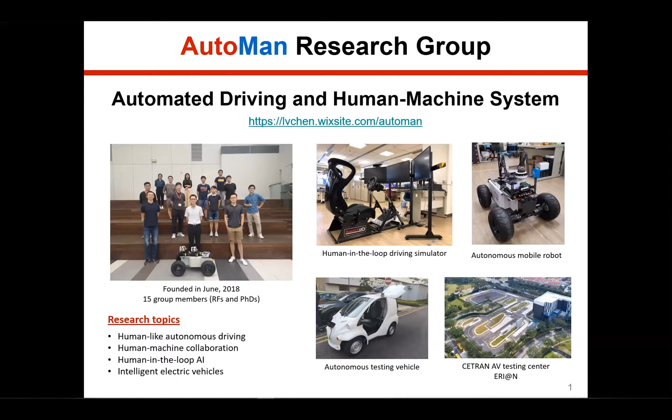The first topic is human-like autonomous driving. Here the idea is not only to realize those basic functionalities of autonomous driving. Instead, we hope to move one step further, to further improve the smartness and ability of AV systems, making their decision-making, path planning, and control more like human drivers.

Because for our human drivers, we have different driving styles or different habits and preferences on driving. Some drivers are aggressive and some are more conservative. And for different travel demands, their corresponding driving behaviors could be quite different.

So in the future, we hope our AVs could be smart enough. They could have their own human-like characters and driving styles, and they could adapt to different travel demands of individual users.

In order to realize human-like autonomous driving, first we need to understand our human driver behavior and mechanisms. How does a human driver drive a car? Here we use inverse reinforcement learning to model human driving behavior.

More specifically, first we formulate our human driving behavior with different objectives and preferences as a multi-objective optimization problem, and design a reward function to represent it. Then by leveraging inverse reinforcement learning and naturalistic driving data, the model can learn the parameters of the reward function directly from the real-world driving data.

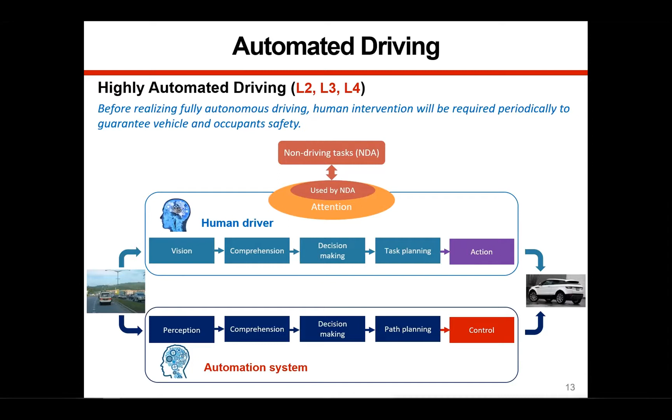Here we develop a novel human-machine collaboration framework. We make no assumption that human driver performance is always better than automation, or that automation is always better than human. Instead, we need to monitor both human and machine status and assess their performance simultaneously.

In order to realize the high-level human-machine collaboration framework, we made efforts to develop multiple supporting subsystems. First, we use computer vision techniques to understand human driver in-cabin activities, to understand what they are doing in the cabin. Here we develop our models using deep learning and transfer learning.

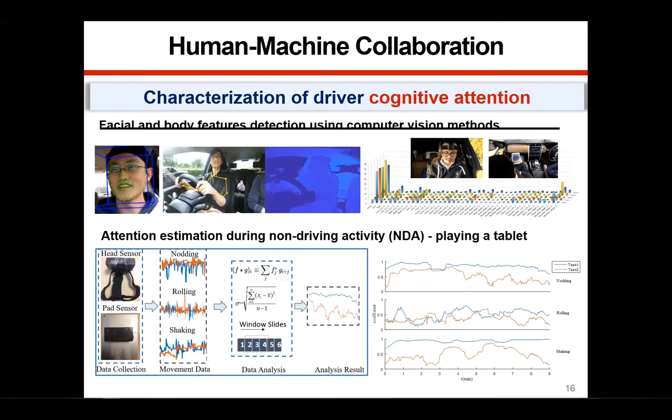Besides, still based on computer vision technology, we combine driver's eye gaze direction and scene features to further improve attention estimation accuracy. We use an RGBD camera to capture driver's eye gaze direction to understand where the driver is looking. Meanwhile, we use a saliency map obtained from scene analysis of the surrounding environment to infer potential attentional regions of the driver, then link them up and fuse them together to further improve the estimation of driver's attention level.

In addition to attention, intention is also a very important state for human-machine interaction, because we need to understand the human driver's intent in order to support him or her and mitigate any conflicts happening between human and machine. Although intention itself cannot be directly detected, it can be reflected indirectly by certain patterns of driver activities.

For example, if a driver wants to change lanes and overtake a car, first he will need to check mirrors and give a turning signal, then take steering actions on the steering wheel. So here we develop a deep neural network model to analyze driver activity patterns, and then extract the intention from the pattern features of drivers' sequential actions.

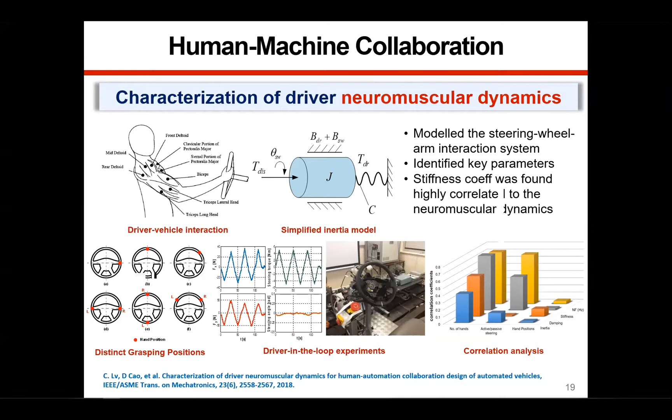Apart from driver state estimation and monitoring, we also design adaptive shared control for ensuring safety of the AV. By evaluating the performance and risks of both the human driver and automation systems' intention and actions, the shared control module will dynamically allocate control authority to human and automation. The haptic steering torque will be generated to better provide guidance and assistance to the human driver during shared control and takeover.

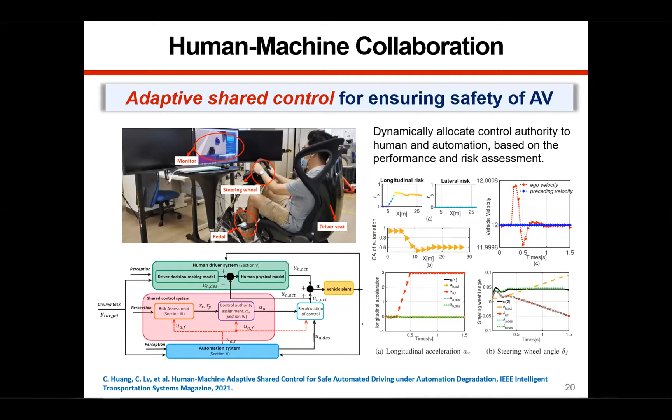Finally, by integrating all subsystems together, we develop our first version human-machine collaboration prototype system and implement it on a real testing vehicle. Experiments have been conducted under typical driving conditions.

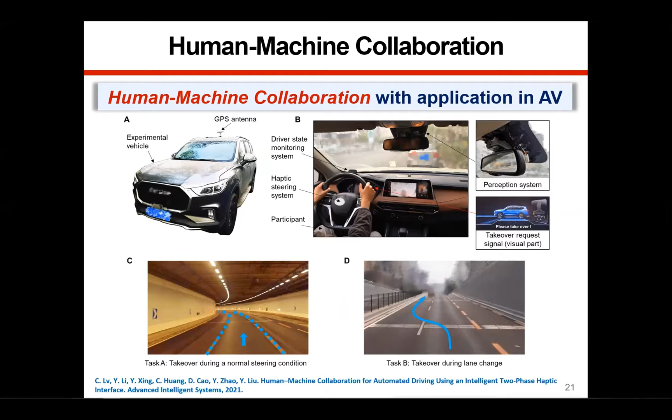Okay, that's all for my presentation today. Thank you very much for your attention. And if you are interested in our research, or if you have any queries regarding our research, please feel free to drop me an email. I'd be very happy to discuss with you. And I look forward to meeting you in the future in person.

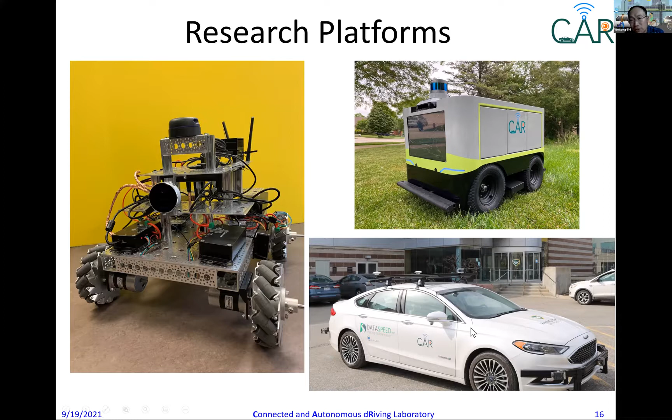The left side is an indoor autonomous vehicle for us to test our prototype indoors. And on the upper right is what we call Zebra T. Zebra T allows us to evaluate things. It's a slow delivery vehicle, but it allows us to do this in the neighborhood, on campus, etc. It's very slow speed, no risk. And the last one is when we develop real stuff running on the road. We're starting to use this Hydra platform on the highway and city roads.

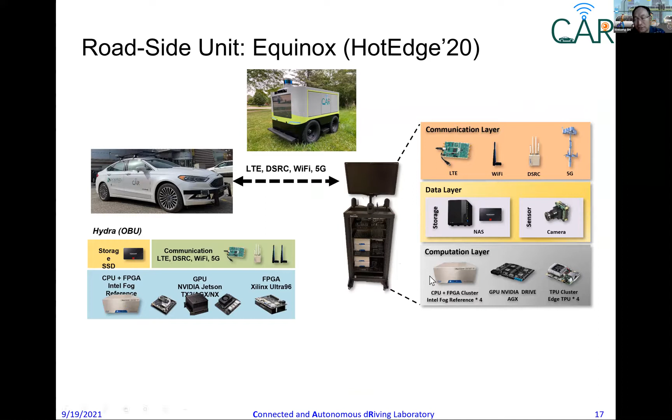In addition to that, we also developed some edge servers. You can consider this an edge server, but it's serving more of these purposes. Thanks to industry partners who have donated different kinds of communication and computing layers here, we can do Wi-Fi, LTE, DSRC, and most recently C-V2X, to allow us to evaluate the vehicle talking to them and evaluate the different platforms.

I still have about 7 minutes here, so I can give you a little idea of what we have done leveraging these platforms. One is what we call E2M. It's called energy-efficient middleware, because if you are in the vehicle, whether it's an electric, battery-powered vehicle or gas-powered, you always want to minimize the energy you're spending on the computing itself.

So that's the idea. We have a paper published in 2019 in the edge computing SEC conference. We have been working on this, trying to coordinate the events. Right now, most of the applications people develop for the vehicle don't actually coordinate. But at the OEM level, you might want to coordinate this. Otherwise, you will be wasting a lot of energy here.

So the results show that the sensing equipment itself costs a lot of energy, and computing also costs a lot of energy.

Together, depending on what kind of road you are talking about, they might contribute about 30% of total energy on today's vehicle. So if we can reduce this, for example, by 50%, then you can save 15% of the total energy on every charge. For example, in an electric vehicle, that can save a lot of energy. So that's just to show you an idea that we have been doing.

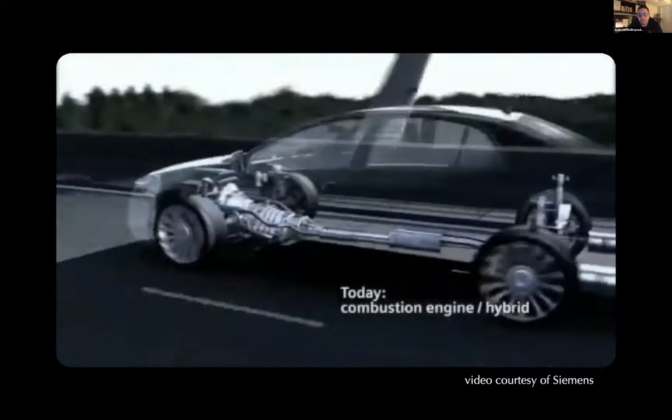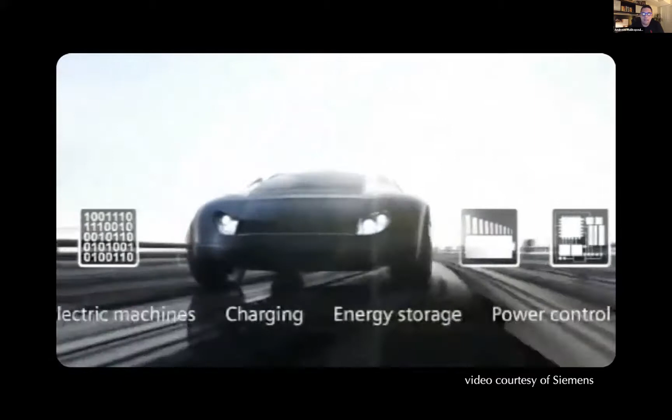So today, what I plan to do is talk a little bit about how we can develop optimal control techniques that we can use to coordinate connected automated vehicles within particular traffic scenarios. We live in a world that is changing, and we're about to have several paradigm shifts. For example, we're about to depart from conventional vehicles with internal combustion engines and move on to pure electric vehicles, which will cause a significant cascade of events and change the landscape of the infrastructure.

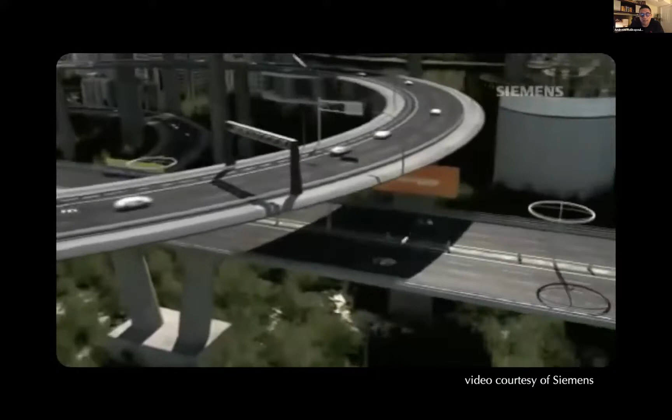We will see a lot of charging stations, shared information, different types of challenges and problems that we will have to address pretty soon. We will have to coordinate energy demand. We have to coordinate different travel demand. On top of that, the landscape of the cities will change with more renewable resources. And as this is all happening, pretty soon we'll have connected automated vehicles that will share information and create a lot of data. So all this is a picture of what is coming in the area of emerging mobility systems.

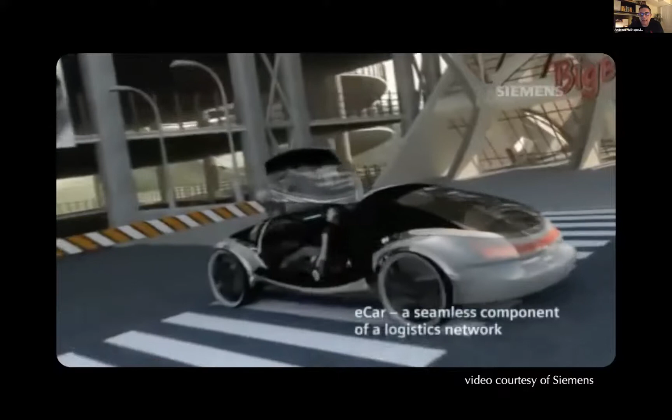And my point here is that we need to develop advanced control techniques that will be able to address those challenges. In this picture and vision that Siemens put together, and we can agree that this is happening, you can see different problems, and all these problems refer to cyber-physical systems. The idea is how we can develop advanced control technologies that can help optimize these cyber-physical systems. Today I'll focus on connected automated vehicles and show you some work we have done to optimize traffic flow with connected automated vehicles. I'll show you some simulation and experimental results, and then discuss a couple of directions for future research.

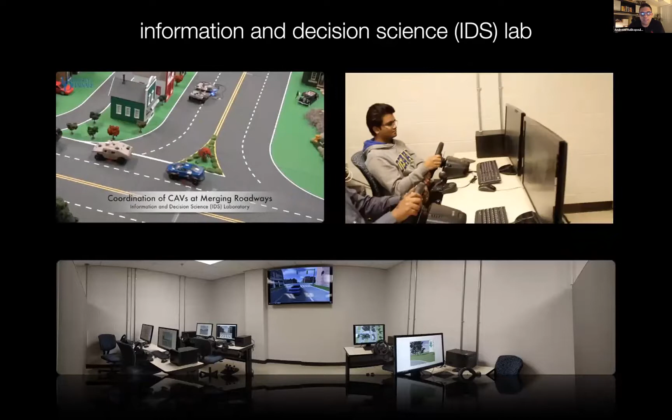We also have a driver simulation testbed with 6 driver simulators that we can use within any commercial software. We use PreScan and VISSIM. And replicate any city in the world that we want to explore. So that was a little bit of introduction about my lab.

Over the years, I have had the chance to work on different problems in the area of mobility and transportation. I started with developing control algorithms on the powertrain of the system, and in particular, how we can make the engine learn the driver's driving style and eventually optimize its operation with respect to the driver's driving style. Then I moved on to hybrid electric vehicles and plug-in hybrid electric vehicles and how we can optimize the powertrain of these systems. And for the last 10 years, I've been working on connected automated vehicles and how we can use shared information and automation to improve the transportation efficiency. This is the topic of my discussion today.

I'm going to try to focus and show you how we can use this shared information and automated features in order to improve efficiency in scenarios like this. In scenarios where we have potential conflict between the vehicles, like intersections, merging roadways, roundabouts, and so forth. Fast forward, before I get to the technical details, let me show you the progress that we have made so far. We've been able to develop control algorithms that can help coordinate vehicles on intersections.

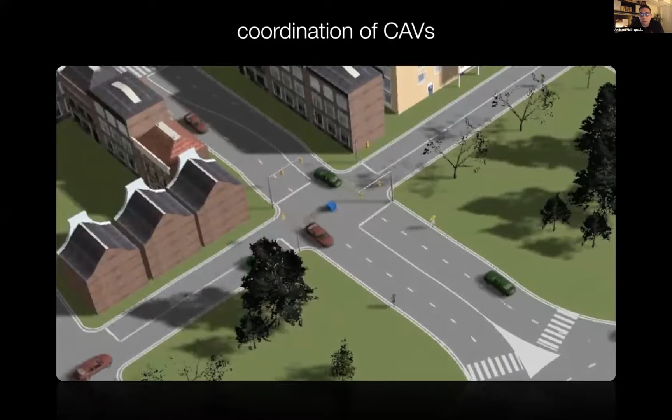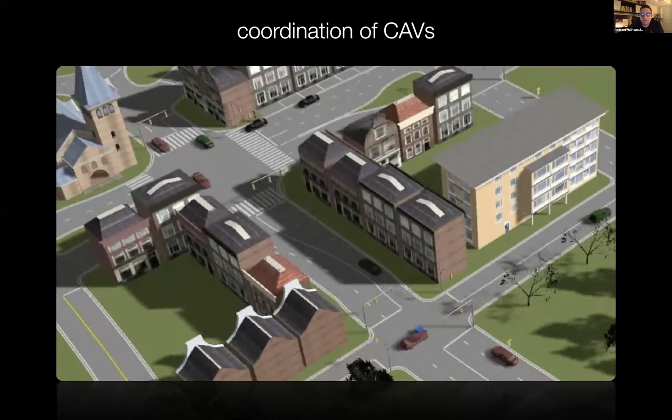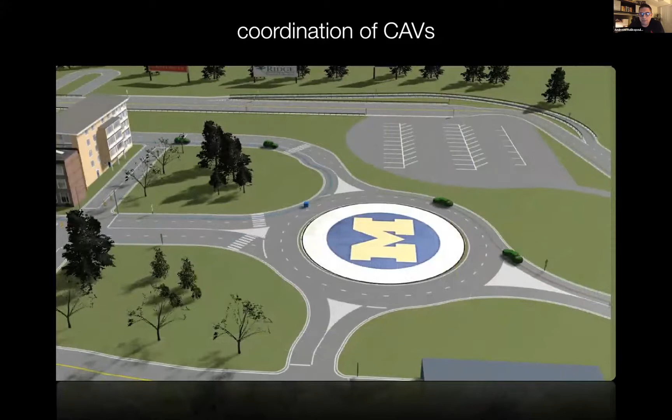We have also expanded this to include multiple intersections in an environment where we have 100% penetration of CAVs. We have also implemented this in scenarios like merging roadways. It's quite straightforward once you solve the problem on one particular traffic scenario to translate the result to different scenarios. We have also considered roundabouts. And then once we put together this toolbox with the solutions for each individual traffic scenario, we can put all of them together and address a corridor.

This is the case where we have worked on a corridor in our scale city that includes a roundabout, an intersection, and a merging roadway. So you can see how all the vehicles can coordinate with each other and cross these potential conflicts without stopping. So with this scenario, we can, in other words, visualize in a scale environment how a smart city would look like in the near future. And at the same time, we can also encounter some of the challenges that we can encounter in the physical world before we go to a physical testbed.

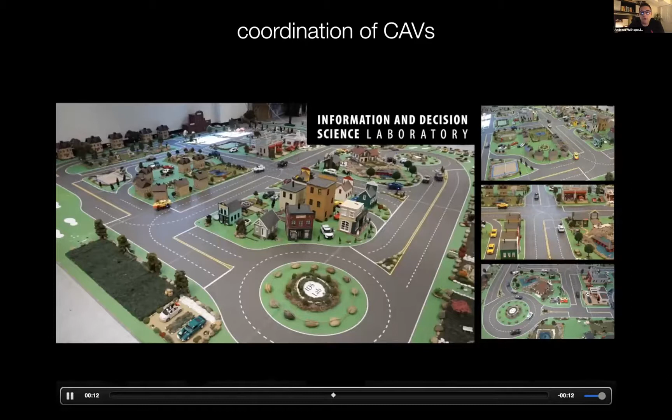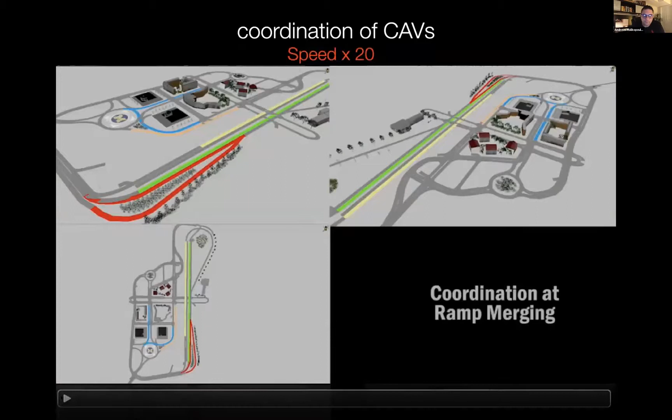And we did that with our test vehicle, the Audi A3 plug-in electric vehicle that we considered during a recent ARPA-E NEXTCAR program project. So with this project, the goal was to improve the efficiency of the Audi by at least 20% using connectivity and automation. So we were able to develop these technologies that I just showed you and run the Audi in M-City at the University of Michigan. So we eventually had the Audi running in M-City within an augmented reality that they have implemented.

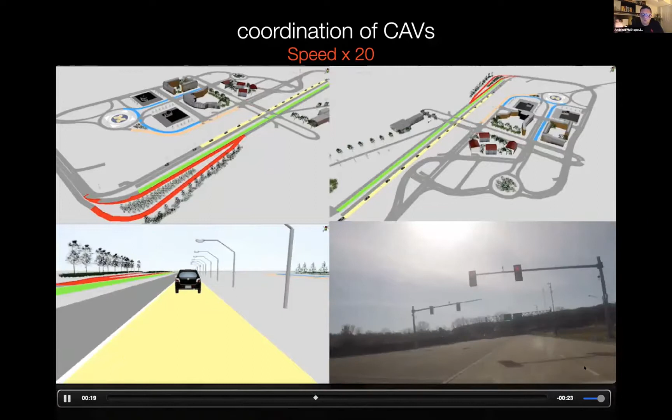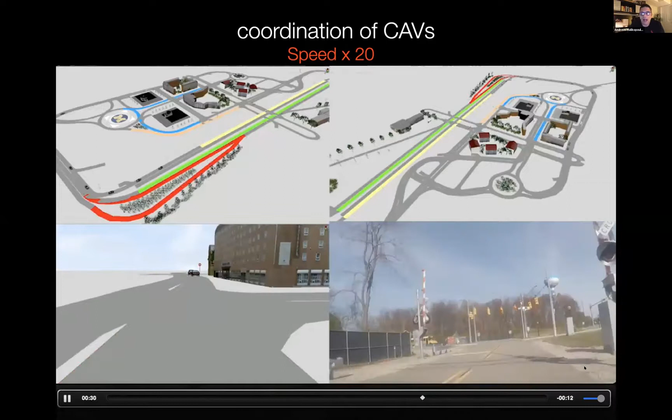So the Audi essentially was interacting with the virtual vehicles, as you can see on the left, and going through different scenarios like speed harmonization, roundabouts, intersections, merging roadways. So we were able to put the Audi in the field, interacting with virtual environments that create a peace of mind regarding the safety concerns, and then address all these problems.

So now let's take a deep dive and see how we can potentially address this problem. I showed you a little bit of the outcome, the final result. I'm going to go back now and show you a little bit how we can get to these areas. To go through these ideas, I'm going to reference an intersection, just because an intersection has some sort of challenges in these cases.

The same analysis, the same exposition can be applied to other traffic scenarios. So we consider an intersection, and let's assume that we have 4 connected automated vehicles approaching the intersection. Apparently, if they keep going, they will have to address some conflicts. So the area within the intersection where we can have a potential lateral collision is called the merging zone. And then we define the control zone, which is outside the merging zone and within the proximity of the vehicle.

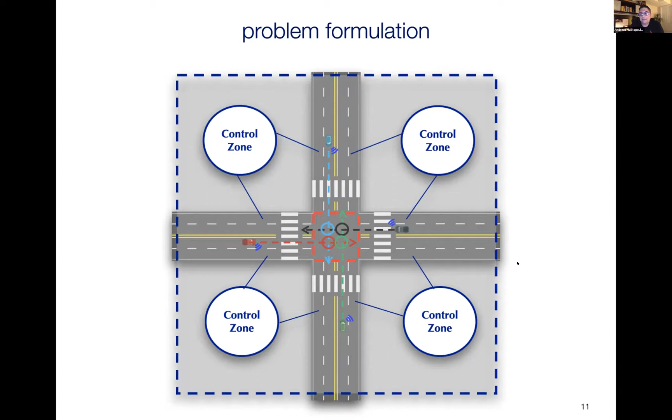So within the control zone, the CAVs can exchange information with each other and then identify the timing that they will be entering the merging zone at the center of the intersection without collision, of course, and without stop-and-go driving. So the idea is for each vehicle entering the control zone to derive an optimal acceleration so as to avoid collision at the merging zone and exit the control zone as soon as possible.

Just to take a look at this problem, once the vehicle enters the control zone, the vehicle needs to coordinate with other vehicles and identify the appropriate timing to enter and exit the merging zone, right? And at the same time, derive the optimal acceleration to cross the intersection. So if you think about it, this is a 2-level optimal control problem.

In the upper level problem, we want to identify the optimal timing that the vehicle will be entering the merging zone so as to maximize the throughput of the intersection. And in the low level problem, given this timing of the entry and exit of the merging zone, we need to derive the optimal acceleration of the vehicle that can optimize fuel consumption.

What I'm going to do now in the next few slides, I'll show you that we can start from the low level solution, the analytical solution, and reverse the solution and formulate a problem that can identify the timing of the upper level problem. So essentially, we can translate these 2 problems into a single level optimization problem. And the reason that we want to do that is that, as you will see later on, the upper level optimization problem is quite involved and cannot be solved in real time on board the vehicle. So we need to have a different way to address this.

So in our analysis, we model each vehicle as a double integrator, enhanced double integrator, where P is the position of the vehicle starting at the entry of the control zone, V is the speed of the vehicle, U is the control input, acceleration, deceleration, and S is the distance of vehicle I from the preceding vehicle K, right? So this is the proximity sensor essentially of the vehicle. Now, somebody might argue, well, this seems a very simplistic model to capture the vehicle dynamics, and that would be a fair argument.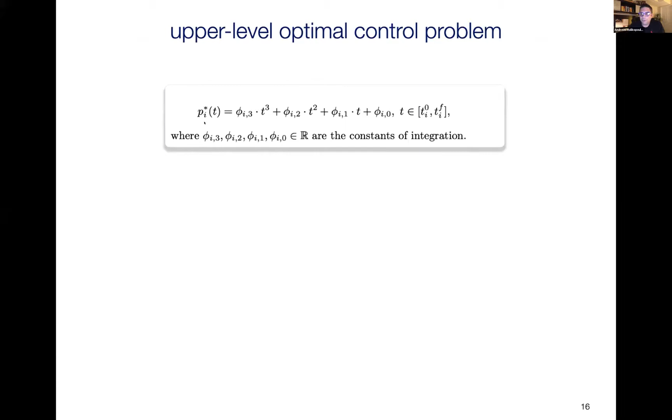So you can get an idea of the kind of complexity we can encounter. Instead of going this way, the idea here was to start with an analytical closed-form solution of the unconstrained case, where no state or control constraints are activated. If you remember, we have a nice cubic polynomial function for the position of the vehicle, and the control input was a nice linear affine function.

Now, the idea is that if we reverse the position versus time, the optimal position versus time corresponding to the unconstrained case, we can get the so-called time trajectory of the vehicle with respect to position. This gives us, essentially, at which time the vehicle is at each different position within the control zone. Once we have all the time trajectories of vehicles within the control zone, any new vehicle that comes in can search within these trajectories and draw a new time trajectory that avoids intersecting with any existing trajectories, while minimizing the time the vehicle exits the control zone.

Once we identify this optimal time trajectory, we can inverse back and get the equation, essentially the optimal position of the vehicle corresponding to the low level optimization problem. With this idea, eventually we can solve both problems at the same time.

The first question we need to address is whether this inverse function exists. It turns out that this position is a real value function, and it is differentiable. It's also a strictly increasing function, so the polynomial function P is a one-one function. So we know that an inverse function exists.

Using Cardano's method, we can compute the inverse function, the time trajectory of the vehicle, which looks like this equation. In this particular case, omegas are the new constants of integration, which are functions of phi. So if we imagine that this is the time trajectory, it gives us the time of the vehicle at its different position within the control zone.

Now, if we evaluate this function at the exit of the control zone, we essentially get the time that each vehicle will be exiting the control zone. We can use this as the objective function for the upper level problem. So essentially, if we evaluate the time trajectory at the position of the vehicle at the exit of the control zone, we got a function, which is a function of phi's.

So imagine that we have the time trajectory now, and we have the phi's that we can play around and shape up the time trajectory. Once we got the objective function to minimize the time that the vehicle will be exiting the control zone, we have the phi's that we can use to shape this time trajectory and avoid any collision with other existing trajectories within the control zone.

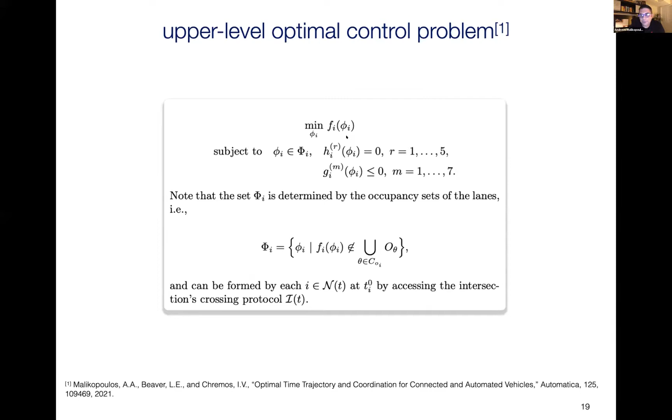Two nice properties we get from this formulation: we can prove that the objective function along with the equality and inequality constraints are all convex functions. By applying the KKT conditions, we can show that there's no duality gap in the upper level problem. So essentially we can solve this problem in real time.

We have implemented this in different scenarios. I'll show you some results right now. I showed you some results already at the beginning, but we have also captured two intersections, merging roadways, speed reduction zones, and so forth.

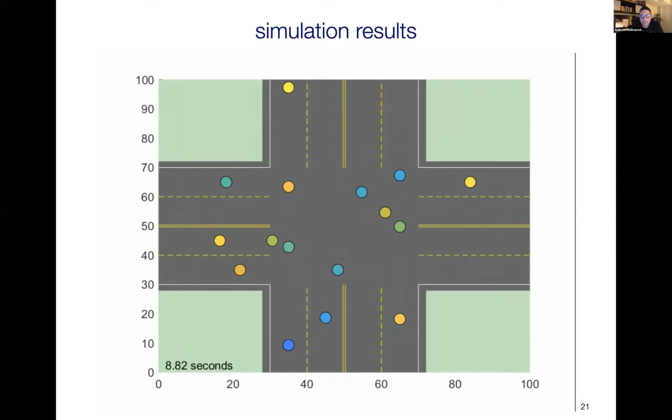This is a scenario, the very first simple scenario in simulation, when we have multiple vehicles crossing the intersection. As you can see, all the vehicles derive their time trajectories and they can cross the intersection without stop and go driving, without any collision.

And again, I want to emphasize that all the vehicles here are connected automated vehicles, and they all follow the same control algorithms by deriving an optimal time trajectory.

And then we moved on to our ARPA-E NEXTCAR project Audi vehicle, and we first started on a chassis dyno at Bosch Farmington Hills facilities. So we put the Audi on the chassis dyno and went through a virtual environment with virtual vehicles.

These are some samples of the speed profiles. In all the cases, you can see that the Audi with our control algorithms eliminates stop and go driving versus the baseline scenario, and we eventually get benefits ranging from 14 all the way to 35% improvement just because we have eliminated stop and go driving with the vehicles.

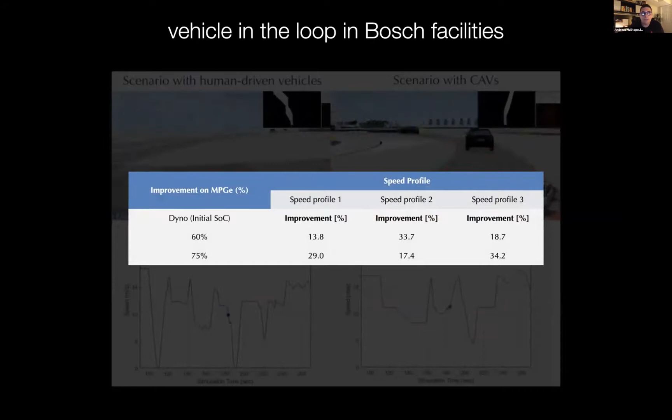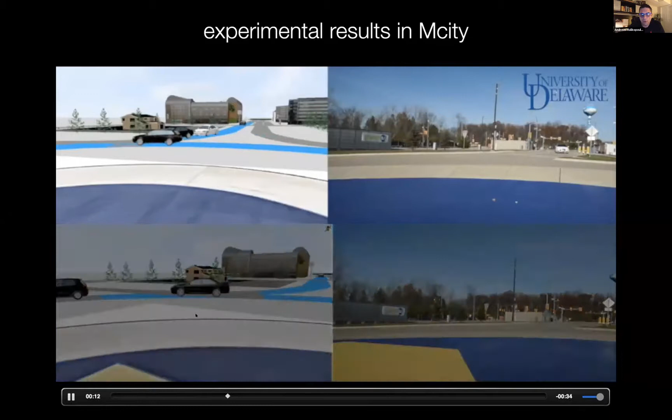We use the same concept in the roundabouts at the University of Michigan. Here again, the Audi will come and have to come to a full stop and wait behind this virtual vehicle. Although in the bottom case, the Audi coordinates and crosses the merging roadway without the stop and go driving.

So just to wrap up, we showed how we can eventually develop a framework that can help coordinate vehicles at different traffic scenarios. Essentially, we have transformed a two-level optimization framework into a single-level optimization framework that can be implemented in real time. As we speak, we're working on incorporating errors and delays in communication with CAVs.

We're also working on different penetration rates, so we use CAVs to indirectly control human-driven vehicles. At the same time, we're exploring areas at the intersection of learning and control, and seeing how we can leverage the benefits of both approaches to address these issues.

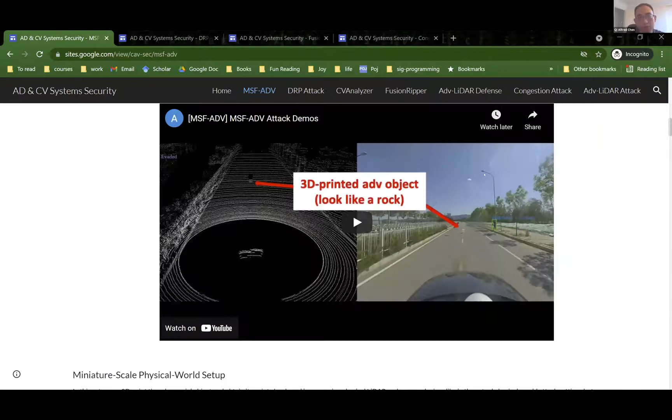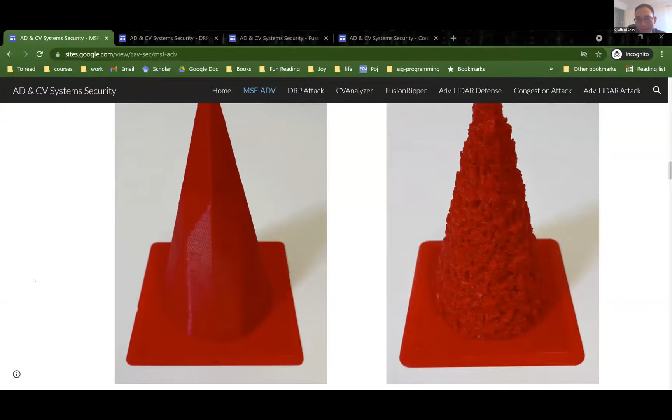We first did in-lab miniature-scale experiments. This is a LiDAR, and this is a 3D-printed traffic cone. This is a benign one, and that's an adversarial one. As you can see, the adversarial one has a very bumpy surface, which introduces noise to the deep learning algorithm input. If we were doing this in person, I have some small ones I could show you physically, but this image is probably the best I can do for now.

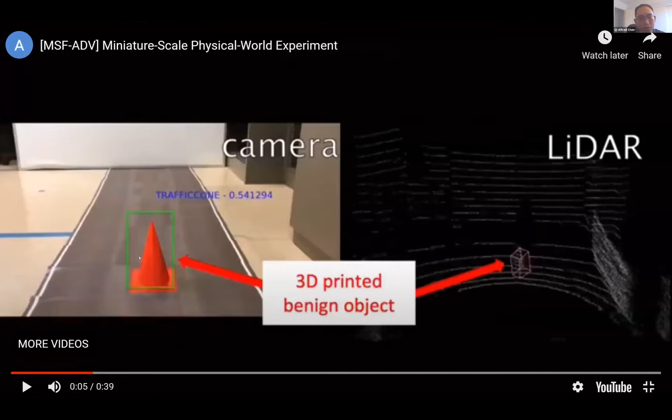These are videos: on the left is camera, and the right is LiDAR. As you can see, this is the benign one. It can be detected by both camera and LiDAR very successfully. And of course, it looks pretty obvious. It's red, and it also has a shape in LiDAR.

And then in this case, when we just replace it with the adversarial one, but putting it in exactly the same place, it disappeared in both camera and LiDAR. So in this case, we do the same movement, but then you cannot see it. I mean the model cannot see it, even though it's very, very obvious to the human eye.

So we also did it with a real car. There should be a cube, and then after we do this 3D manipulation, it becomes like a rock, because a rock can have this arbitrary shape and still looks seemingly benign. As you can see, this is the rock, and it looks pretty obvious to the human eye with this shape. And also in the camera, this looks like there's something there.

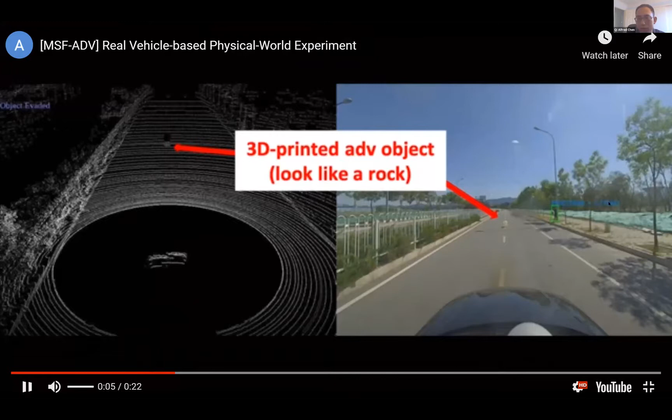But then in this case, it's the same. So we drive towards it, and then it cannot be seen in both camera and LiDAR. Right.

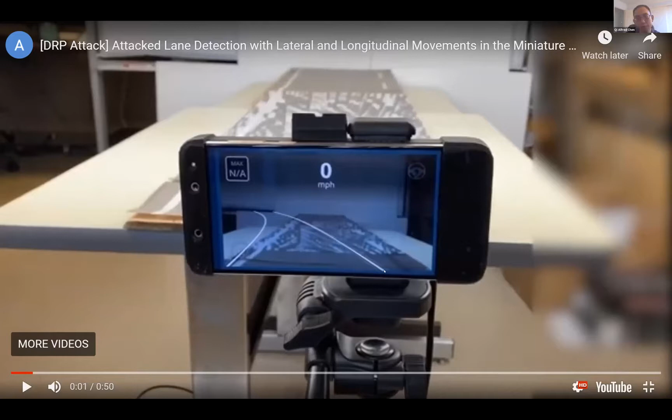Also a demo to make it concrete. We start from in-lab experiments where we set up this miniature road and put the patch on top of it. This is the camera for a production ALC system, an automatic lane centering system. And as you can see in the visualization, once we put this patch, the detected lane lines are just consistently deviating to the left, no matter how we move it.

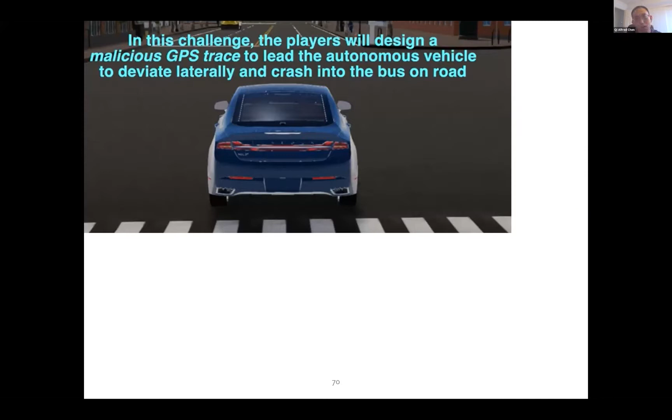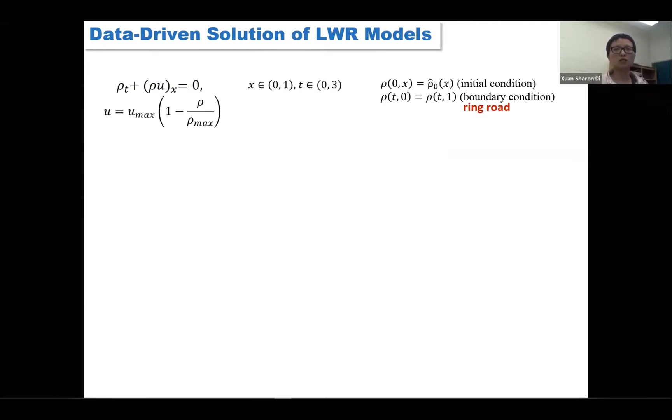Okay, so now let's give you an example to demonstrate that process. We just use an ideal LWR model. The first equation is a flow conservation. The second is the fundamental diagram. We use the Greenshields here. And the domain X and T are defined. We also define initial condition and boundary condition. We assume it's a ring road. That's why the density at the starting point and ending point are the same. And then we can theoretically solve this LWR system using numerical methods, and I provided the numerical solution here in the T and X domain.

However, if we have some observations, these observation data we call the labeled data because they contain both the TX pair and their target value rho. This observation can be measured, say, on the initial condition. So at time zero, assume we know all the traffic density along this road. And we also know the boundary conditions. For example, we place two loop detectors at the starting point and ending point. And if there are also some loop detectors within the domain, we can also measure the density rho in those fixed locations across time. Or if we have another type of sensor like mobile probe vehicles, then the density near the trajectory where this car is passing by can be measured. So this is the observation data we may have.

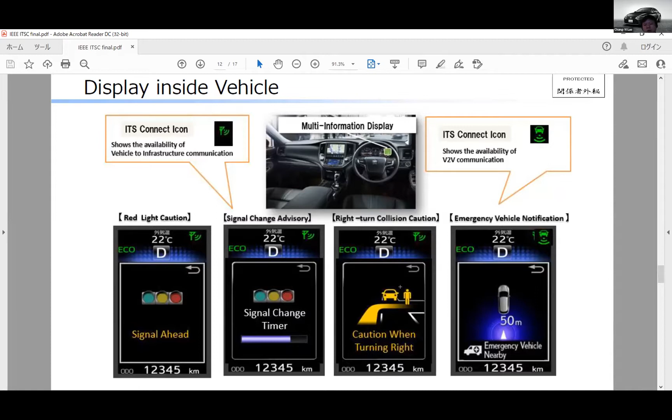And for the right turn collision, we also have two phases of warning, a soft warning and a hard warning, to tell the driver to be careful. And here I would like to show you the ITS Connect video so that you have some idea how we are promoting this kind of technology, and what aspects we are trying to sell in the service. So I will put the video here. Okay.

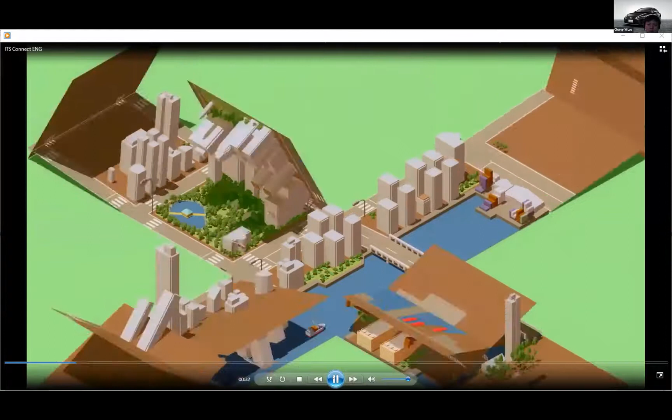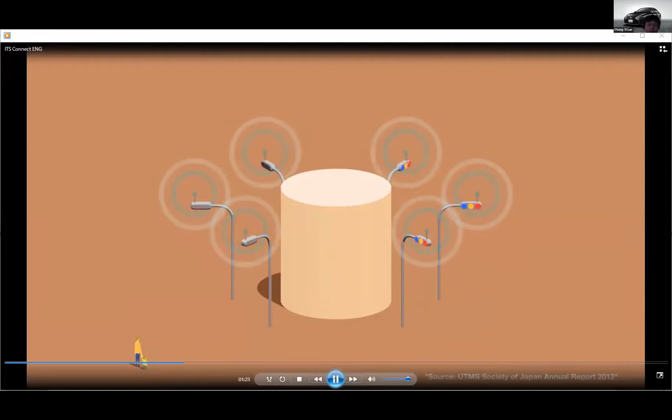Vehicle to vehicle. Vehicle to pedestrians. Vehicle to infrastructure. When they are all connected, daily life becomes safer and more secure. ITS Connect. It's already started. Supporting safe right turns. This service uses roadside infrastructure to detect oncoming vehicles and pedestrians in real time and presents this information to the driver to support safe right turns. This service is expected to reduce accidents when turning right.

Notifying drivers of an approaching emergency vehicle. This service uses direct communication between vehicles to promptly notify drivers of an approaching emergency vehicle. Following the vehicle ahead more smoothly.

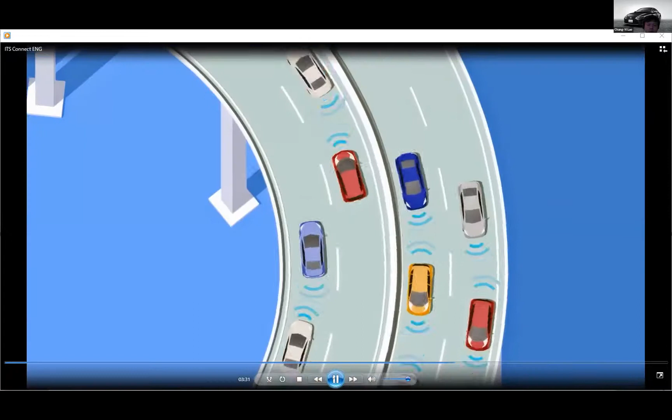This service integrates radar cruise control and vehicle-to-vehicle communication to enable smoother, safer following of the vehicle ahead. This service utilizes information from traffic signals to reduce unnecessary acceleration and braking to promote eco-friendly driving. This service is expected to reduce CO2 emissions.

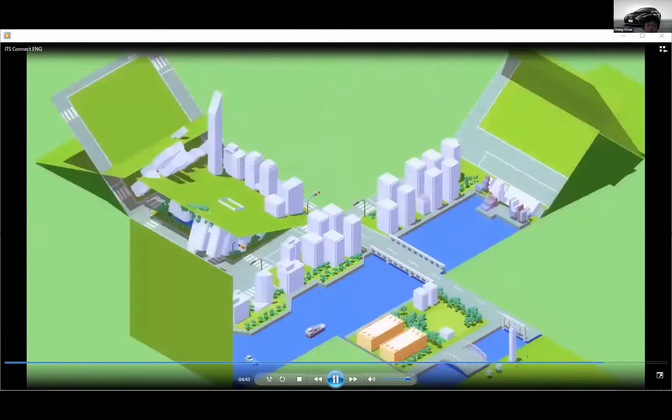Vehicles, people, and society, all connected by ITS Connect. A service that makes life better for all, and it's already started.

So you can see this is how we at Toyota try to promote ITS Connect and the V2X service in Japan. The service actually came out several years ago, but still now we are waiting for what the service can put more into the car and also in more regions. So here I would like to share the last part about how to link V2X to product and reality.

So to become a product, usually in our product planning we need to ask what's the selling point. If it really is a customer need, the customer will buy it. Another important thing is the price - is the price enough compared to other products? Is it enough to sell? Or for regulation, is the government going to mandate it? Or will any assessment like NCAP put it on?

So just now we said in US, EU, China, Japan, there are still many challenges in V2X. But as in the beginning case, how to connect it with V2X, especially short range, maybe we need to consider how to make it become real. And often when we talk about the vehicle and the infrastructure, who comes first - is it like a chicken-egg problem? There's always no real solution here.

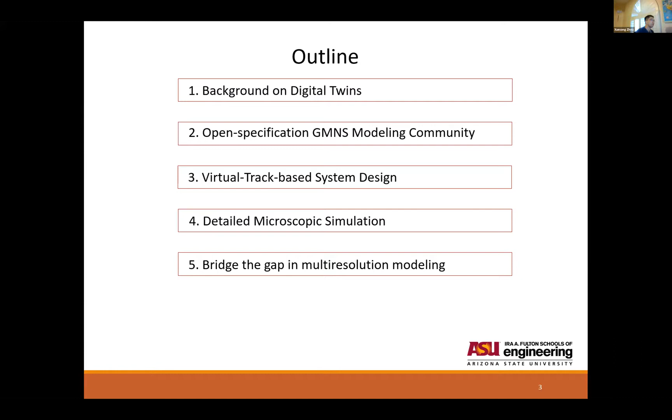Later we will present 2 research tracks we have. One is high fidelity CAV simulation. Another is how we can bridge the gap from large scale planning to high fidelity simulation.

I have 4 motivating questions to ask. First, there are many companies building their own version of the digital twin for different smart city applications, but how can we encourage collaboration between OEMs, researchers, planners, and engineers in the field? Second, as our research community has been using different open source, open tools, how can we join efforts together to pave the way for some interesting applications and real world deployment?

We will show our experience, our recent experience of developing a high fidelity multimodal simulator. The last question is actually the most theoretically important one: can we bridge the gap between multi-resolution modeling? Because in traffic flow theory, you can use a micro simulation model to derive speed-density aggregated relationships, and also the other way around. We should use these kinds of theoretical results to show more insights and to guide our simulation.

Therefore, my research topic today will be presented in 4 small parts. The first is to show our experience using open data specifications and different open source tools. Second is a quick demonstration of CAV Lite, an open source high fidelity simulator still in progress. Number 3 is to show our perspective on internally consistent multi-resolution modeling for larger scale systems. The last one is to enable some quick decision support along this line.

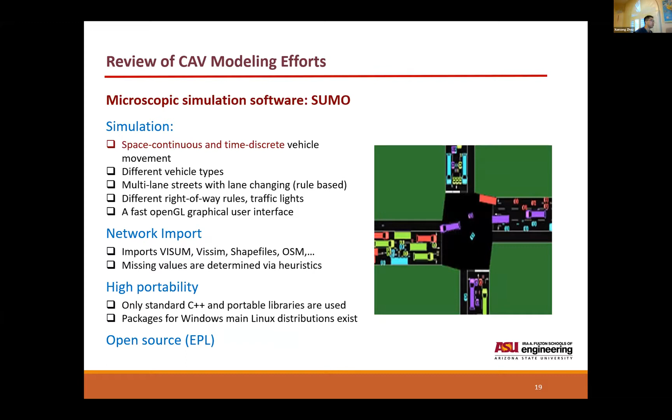So what we see is the challenge for us is how we can incorporate the distributed control framework, how we can add the different optimization components, how we can ensure the consistency between the high fidelity, low level representation to a regional level application. So by recognizing these challenges, our student Jay, who developed the OSM to GMNS, we have a package,

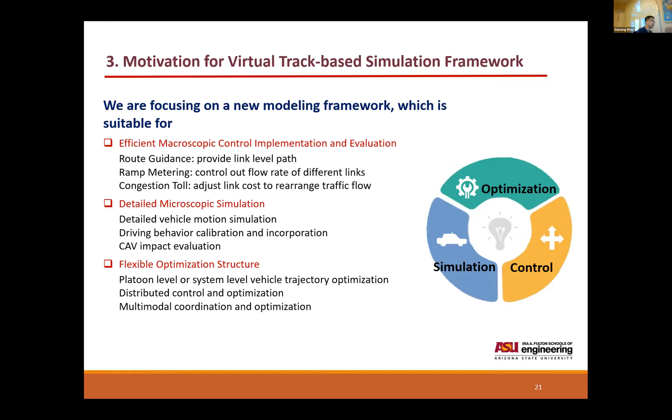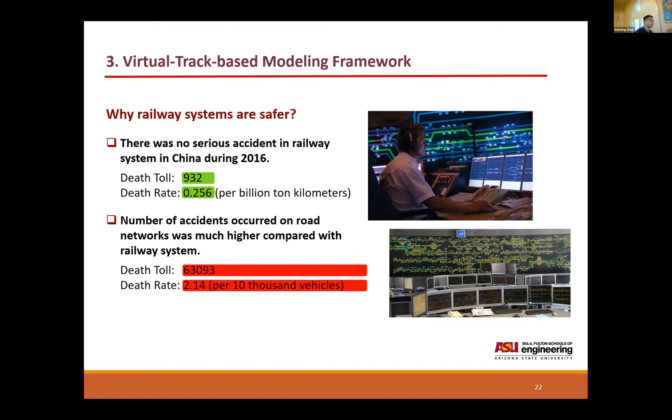CAV Lite. We try to recognize those motivations and try to provide a bi-level hybrid, integrated simulation, control, and optimization package. All motivation is coming from this virtual track modeling framework, starting from an NSF project. As you know, the safety on the railway system is extremely high because they have the different blocks, either manual block, automated block, and the moving block, to incorporate the state-of-the-art communication into their safety guarantee driving maneuver.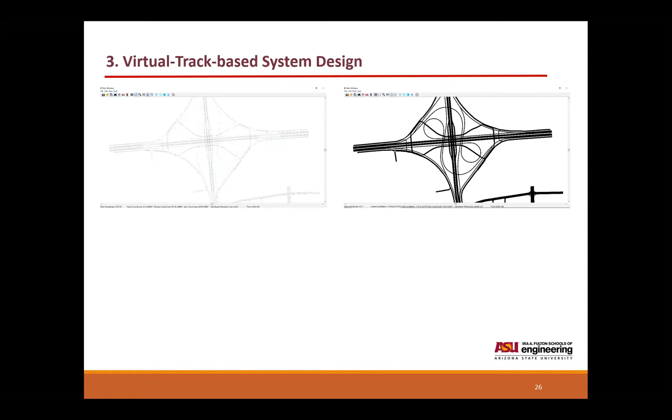So as you can see, at the current stage, we do have an integrated simulation and optimization framework, and we have two levels, macro level, link by link, intersection wise, and the micro level, which we use 7 meter or 5 meter, depending on your definition, to create a lane by lane simulation representation. So as you can see, we present these two layers of the network.

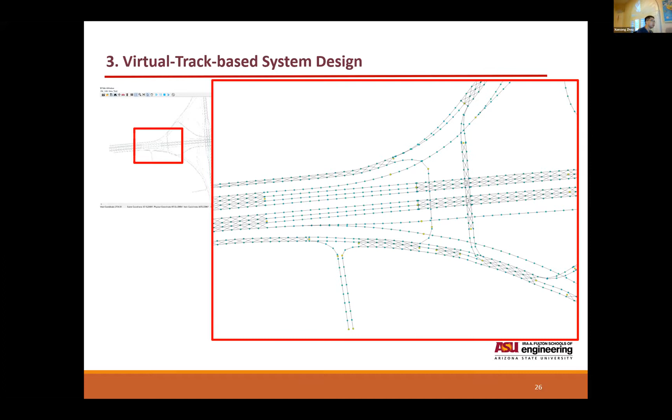And if you zoom into one particular intersection, once you have the OpenStreetMap, we have a tool which is called net to cell, to help you generate this default lane by lane, lane changing simulation network, for you to conduct your own research. We do demonstrate that if you try to model the lane changing or model the route choice, you can develop a consistent route choice model based on the cells.

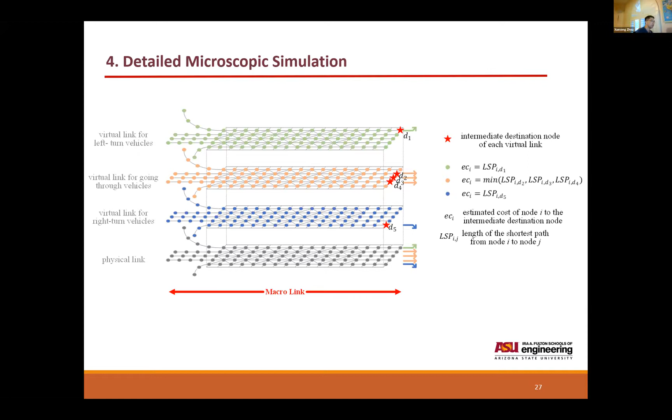This route choice model is represented in 3 terms: estimated cost to the destination, waiting cost, and the moving cost. I don't want to enumerate all the details here. This is a quite open framework for you to consider both lane changing and car following in a very consistent way.

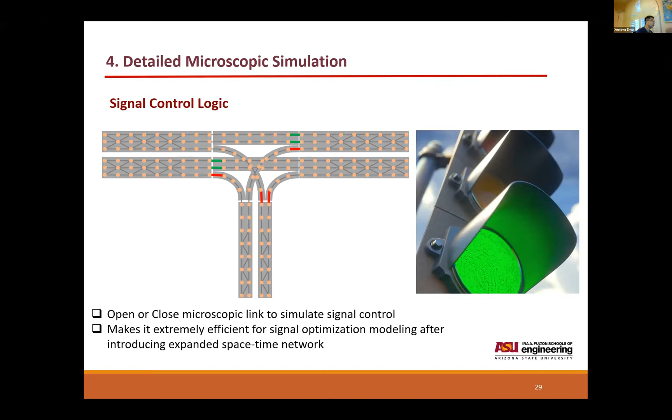The traffic signal control was provided from the meso layer, movement layer, back to this cell layer. So in this case, you can very efficiently map this movement layer signal timing to the cell-based traffic movement control. I do have a representation here to show our animated vehicle trajectory. We can use both a 2-dimensional view and a 3-dimensional view to investigate all the safety and efficiency along this way.

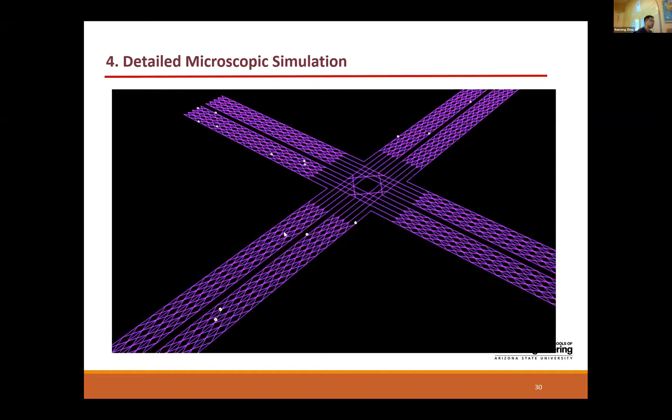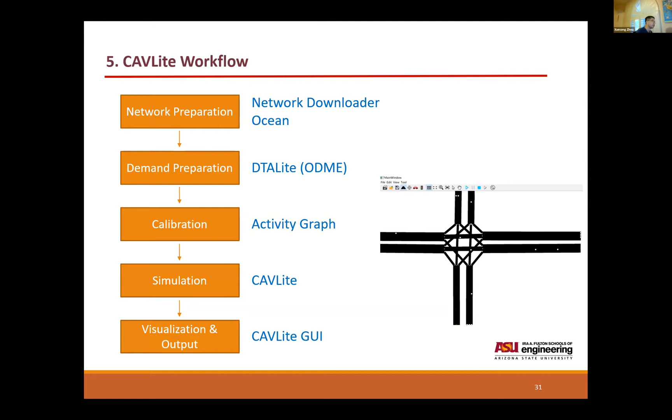So typically, CAVLite is executed in the following workflow: prepare the data, OD estimation, calibration of the route choice, simulation using our CAVLite, and then do the visualization. So in particular, the network representation was created by net to cell. We can create the lane by lane, movement by movement, and even the lane changing arcs, all through this package based on any city in

OpenStreetMap from the beginning. So by doing so, we hope we can allow the researchers to look at the safety, to look at the cell-based link flow, and to look at other driving behavior along this line. So for simplicity, you can try to look at how the CAVs and human-driven cars are merged. So if you use the grid-based, the cell-based representation, the question could be quite interesting:

where are the merging points? Where are the likely merging points depending on the geometry of this merging section? What is the likelihood of lane changing before the intersection? And what is the lane changing time duration? So by doing so, we hope a grid-based, fully discretized network will help you to capture many behavior factors in this representation.

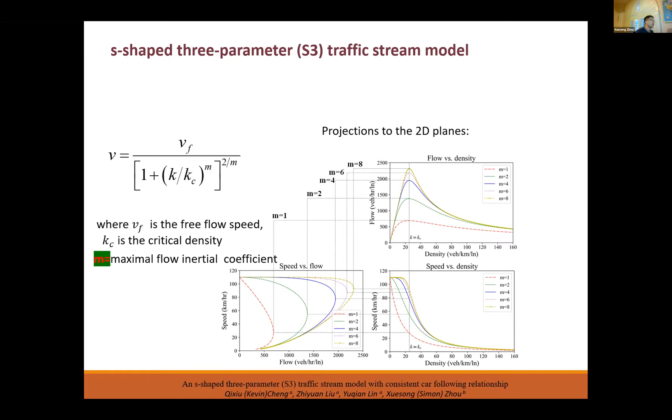So we use these 3 parameters to show that with free flow speed, critical density, and the maximum flow inertial coefficient, you can try to describe the different traffic behavior in Germany, in India, in China, in the United States, or maybe in a very high efficient driving condition in Japan. So by using these 3 parameters, we are able to capture the inertia for the different driving populations in terms of maintaining the maximal efficiency in the system.

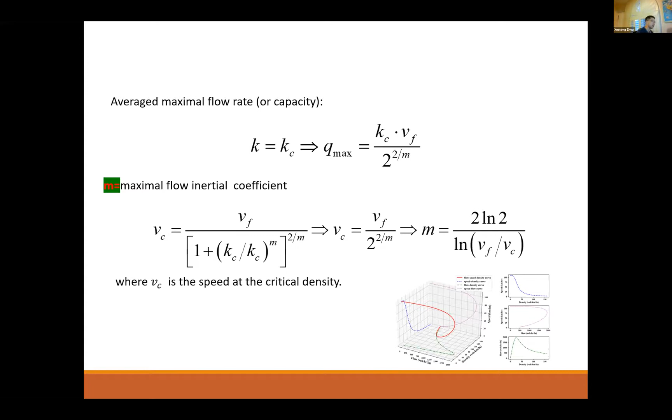And in this recent work, we are able to show that using these 3 parameters, we can capture the capacity constraint, we can capture how the capacity will be controlled under the different critical density. And also we show there's a consistent relationship between our speed density relationship and a GM, like General Motors, based car-following model.

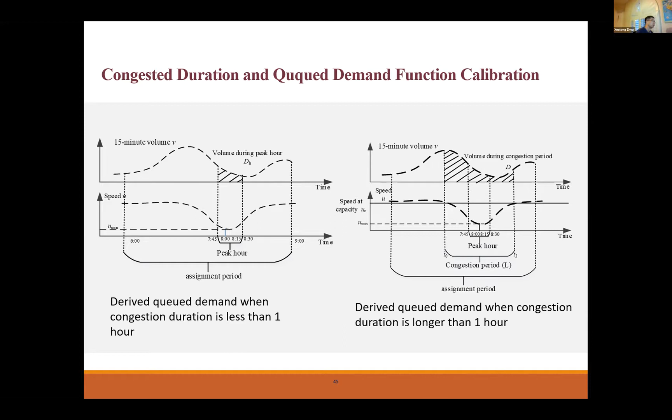We are currently also working on the congestion duration calibration for the Washington, D.C. area, and they asked us to use the different representation to capture the congestion duration from 9 to 10, capture the most congested point along the corridor. So we are working on them along this line, try to really build a much more consistent relationship from the micro relationship of the queue to the macro relationship of the total demand and the queued demand.

So many planners know we have been using the volume delay function for a long time, and we are helping the planners in the different regions to calibrate this model. We are not just calibrating the traditional BPR function. We say they need to have this queue demand perspective starting from the fundamental diagram, so that we can use some closed form solution to manage the overall congestion duration at a corridor scale first, and then later we can control from the lane capacity to the driving headway to the detailed driving trajectory. So that is the multi-resolution perspective we try to offer today.

Finally, we are currently working on this Washington, D.C. dynamic traffic assignment deployment together with Northern Virginia Transportation Authority. And this decision tool eventually will help them to make the programming decision, and will help them to allocate the funding for the next six years. And this is our motivation, try to build this digital twin for informed decision support.

Finally, this is my slide. At ASU, we are working closely with the different communities, with the different planners. We hope by using this open standard, by highlighting the need for this network-wide high fidelity simulation platform, and also by highlighting the need for the theoretically consistent traffic flow model along this line, we hope we can work with different communities and streamline the process and transform this research into practice.